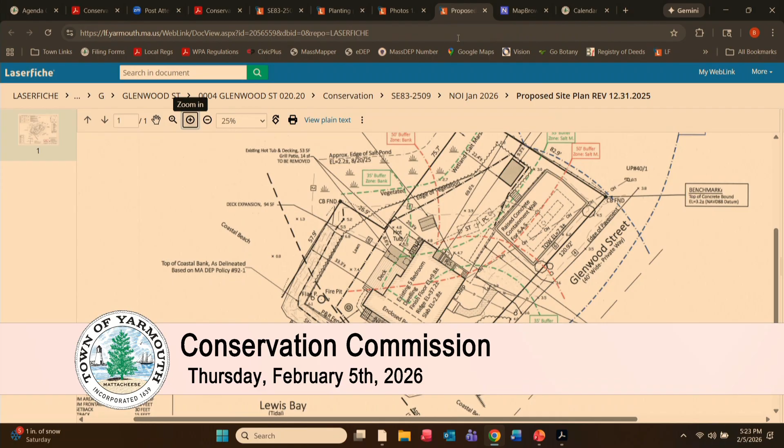And then Blue Flax has put together a mitigation and planting plan, so I'll hand it over to Cece now, and she can review that with you folks.

Great, thanks, Matt. So our plan is proposing a total of 3,300 square feet of invasive species management and native plant restoration, which in the previously approved restoration mitigation plan, there was about 1,100 square feet of mitigation proposed. So we are taking that and adding onto it, tripling that amount.

We're proposing invasive species management in the dark green hatched area just adjacent to the salt marsh, where we've observed bittersweet, black swallowwort, and phragmites. So we're proposing to manage that in approximately 794 square feet.

Just adjacent to that, we're proposing to create a vegetated buffer strip where there currently is lawn. This area will be about 966 square feet to be restored with native plants and shrubs.

And then in the area just to the east of that, in the lighter green area, we're proposing to remove existing lawn and rugosa rose and replant with native perennials, shrubs, and a grass and wildflower seed mix.

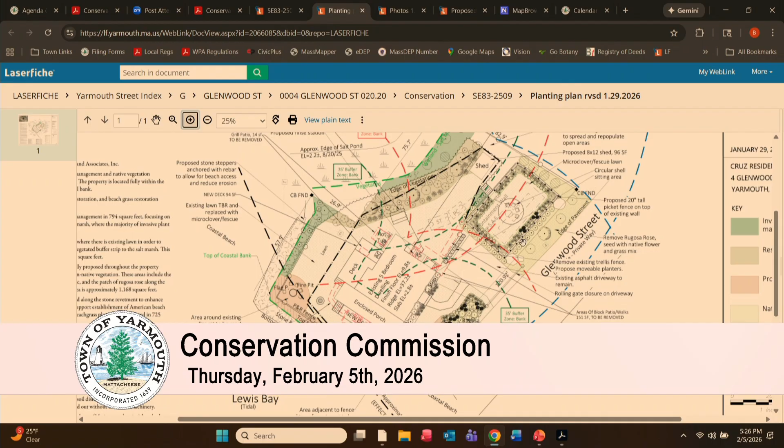And I'll just take it from here. So to conclude, we had a little bit of time since our last continuance. We did have a chance to meet with Brittany last week. We understand your regulations of no structures in the velocity zone and the 35-foot no-disturb zone.

So we have requested a variance for that work. We hope that what we're doing to the site can allow the commission to approve the variance for the construction work.

As Cece stated, Blue Flax has spec'd about 3,000 square feet of mitigation, where about 1,200 was required from the old enforcement order, so it's about 1,800 square feet overall.

And at that, we'll open it up to questions from the commission. Thank you. Anybody want to start?

Go ahead, Ellen. Okay, I'm looking at the drawing that has the area calculations table on it. I was just trying to reconcile that with the description. Could you walk me through the mitigation? There it says proposed mitigation, the 966 square feet. Yeah, that's just part of it.

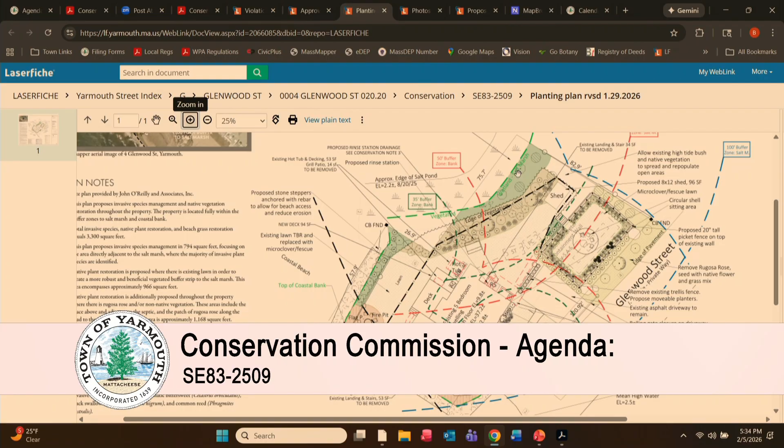Okay. So just to be 100% clear, there's approximately 11 to 12 feet of lawn area that they're taking out and vegetating. I'm going to be honest with you, and I'm speaking for myself, not the other commissioners, but I would not approve this as it stands with the shed.

I would like to see a patio instead of a deck, and I'd like to see the driveway made pervious. Then I'd be more likely to consider okaying it. I'm okay with the rinse station and the tiny addition, which I believe is next to the rinse station. But I'm speaking for myself.

Thank you, Mr. Chairman, if I may. I would actually be okay with the shed where it's located, just because it's next to the concrete wall, so if there were floodwaters, there's already a structure there that the water would run into. So I'm less concerned about that, but I do second your comment about having the pervious driveway.

Those are just my thoughts. Anybody else? Well, it's a complex structure, a complex site. And of course it would never be built today, and we know storms are coming.

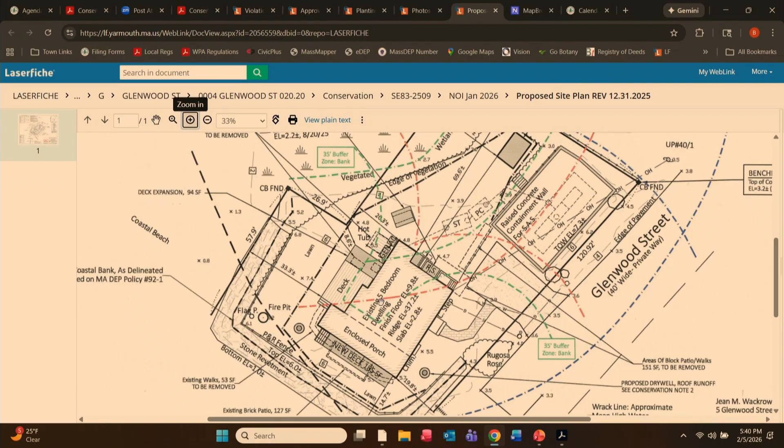It's just a continuation of that deck. And how high are the two decks going to be off the ground? The same. Which is how high? I don't have a measurement. 3.5 feet. We were looking to just basically extend the deck, resecure the new pieces, and the front deck would have been the same height that it is now.

And that's it. Anybody else? Brittany?

Yes, we did meet and discussed some plan revisions. From my perspective, to meet our plan requirements, I'd like the buffer zone lines edited so we can clearly see the zones of the 35 as we discussed, and the mitigation table we've been talking about, to eliminate the unapproved impervious cover areas and clarify the mitigation planting total for this project minus what we have for the enforcement order, with a total to match the Blue Flax plan, which she has called out in the notes separately, just to have everything in one place on the approved plan.

And those are all my comments. Just to remind the commission, this is a variance request for both the velocity zone regulations and the 35-foot no-disturb buffer. Anybody in the audience have a comment or question?

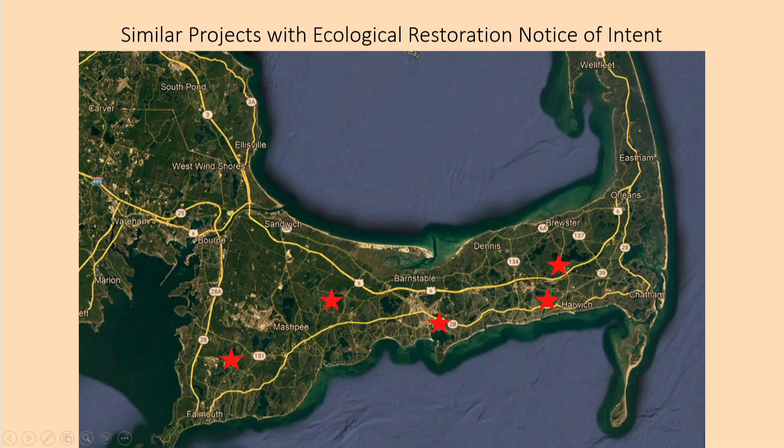These are some examples of other projects that have gone through the Ecological Restoration Notice of Intent. There are likely others, but these are other retired cranberry bog projects that have gone through this as well, so it's not a new process—well, it is a relatively new process, but it's been going through over the last year or so with a number of examples, which is great.

So I'm going to bring you through a picture tour here, and you'll notice in a number of spots where it looks pretty nice. You might wonder why we are doing this restoration project and why change what already looks to be decent habitat. Some of the elements degrading the habitat here are a little bit tricky to see because this site has been abandoned for over 50 years. There's been a lot of plant growth, a lot of recovery since that time. In this particular picture, we're starting at the upstream end of the project site.

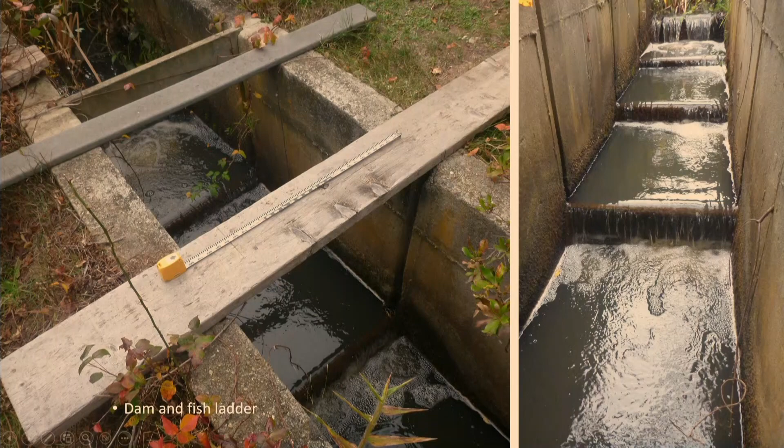We're looking at a portion of Miss Thatcher's Pond. What you can't really see very well is a big patch of invasive Phragmites over here, as well as the dam and fish ladder that restrict flow on the downstream end.

So this is part of an earthen berm here, a concrete dam and fish ladder, just on the downstream end of that. If we continue to move downstream, we see a former cranberry bog here. Again, doesn't look like it, but there are ditches throughout here. This is the stream channel, and this is actually an example of a narrow spot where some large wood fell in and created a bit of a constriction.

This gives us a sense of what the channel dimensions should be in this area, and that is the designed channel dimension in this particular area. You'll see in other locations where the existing channel is over widened in further downstream locations.

Again, this is a wetland upstream of Weir Road. This is actually a location where we won't be touching anything at all. This is part of the former cranberry bog again, but not in an area that we will be disturbing, so that will remain as is, but evolve over time as these conditions shift. Close to Weir Road, we can see an earthen berm that separates the waterway on this side from the wetland on the other side. This is a berm that will go away during construction as part of these designs.

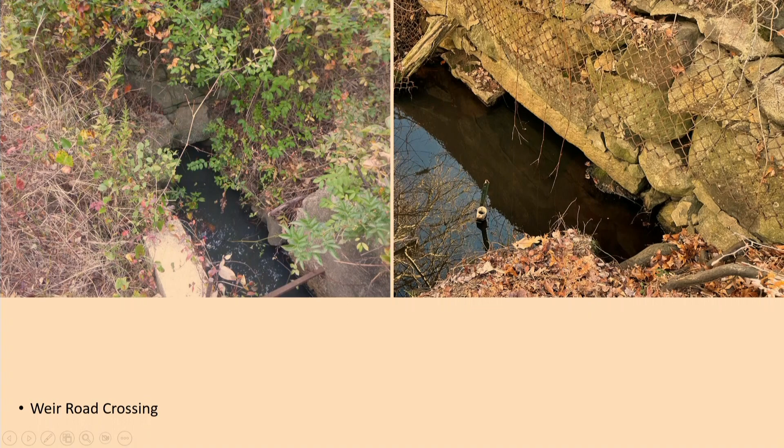That is something that prevents water flow right now and prevents that continuity of flow. And this is Weir Road, so this is the small culvert underneath the road. Again, hard to really see the culvert or the condition of it, but suffice it to say it's much too small for the waterway here. And this is one element of replacement, with a larger crossing here.

Downstream of Weir Road is a pretty special place also, and we have minimal disturbance in this area. This is a really good example of some of the microtopography that occurs in wetlands, and this is some of what we'll be trying to recreate in some areas.

So nearby, this particular spot is another location of ditches. You can see those former cranberry bog ditches. There are elements of this section downstream of Weir Road where we'll be filling these ditches, plugging these ditches, and doing some of that microtopography within those areas or adjacent to them. It's not going to be like you'll see on some of the other projects where there's disturbance everywhere. This is sort of a selective approach: go in, fill some of these ditches, do some microtopography to break up that sand layer that was laid on the cranberry bogs and increase the ecological function there.

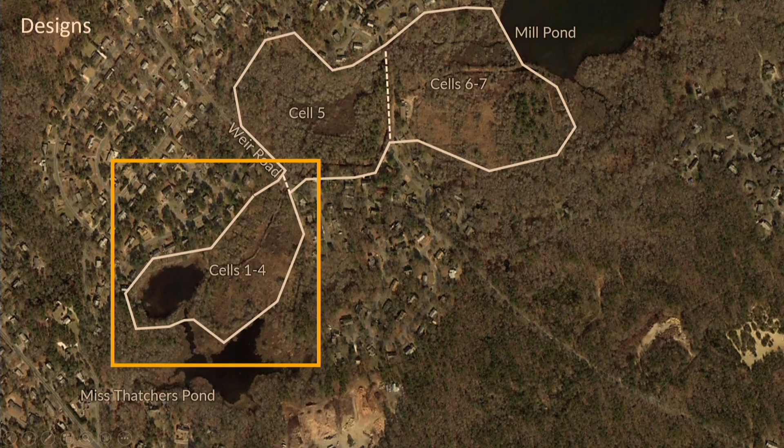So I'm going to start with an overview of the designs from the upstream end moving downstream. These are not engineering designs, since you have those in front of you, but this is for the broader audience to give a general idea of what we're planning.

This portion of Miss Thatcher's Pond will remain unchanged. We recognize the value of that open water for waterfowl and other ecosystems in the area. The dam in this location will be removed, so this open water will be reduced to a smaller, deeper pond with a meandering channel upstream and downstream of that point.

The berm along this location will be removed, and a trail with no infrastructure through the forested area will be available for pedestrian use from Weir Road connecting over to this area. These trails will still remain accessible to landowners.

As mentioned, Weir Road will be replaced with a much larger crossing, which I'll show in a moment. Moving downstream into Cell 5, again less disturbance, so no channel construction through this dashed area. A little bit of channel construction at the downstream end as you go through a new crossing to replace that undersized culvert at the earthen berm, and then the new channel as it comes underneath Weir Road to connect with the existing channel.

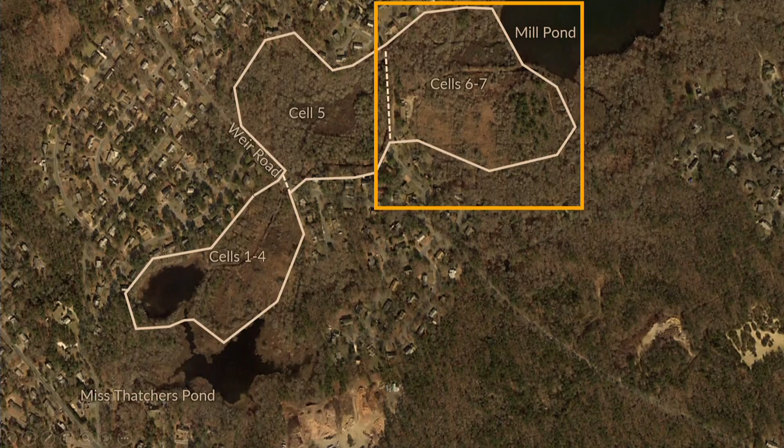Moving downstream into cells 6 and 7, we'll have pedestrian crossing number 3 that goes over that earthen berm, connecting it so access will remain. Then we'll have the boardwalk that extends along this berm, where portions of the berm will go away.

The ditch just to the south will get filled in with the earth that comes out of the berm there. Mostly invasive plant removal in that location, earthen berm removal at the downstream end, and where these big pine trees are, some sand removal and ditch filling, as that has become more of an upland area instead of a wetland.

So with all of this done in this area, we'll see more tidal conveyance, especially as North Dennis Road gets replaced in the future, giving connectivity here rather than blockages of flow from this berm.

This is one typical detail of the Weir Road crossing—a cross section developed by Tighe & Bond. They are joining us virtually and can show more details if there are questions later.

What we're looking at here is the top of the road surface, and the new water line, which will go in this location, a little bit higher than where it is right now. Currently it's down at this elevation. This will be the structure put in place: an arch with footings here.

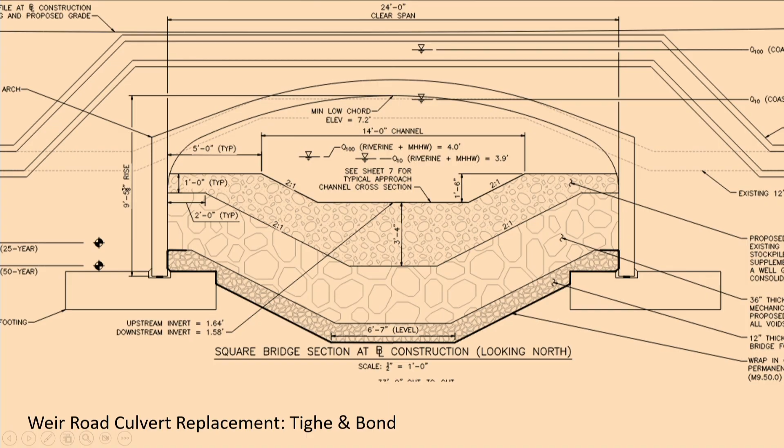The pedestrian crossings, we walked through those before in terms of location. We have pedestrian crossing 1 at the upstream end, 2 just downstream of Weir Road, number 3 at the earthen berm down there, and the boardwalk further downstream.

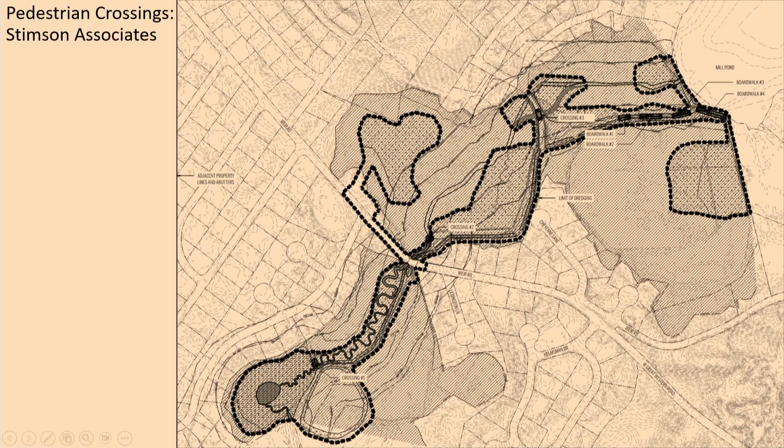Crossings 1 and 2 are very similar in that they're just pedestrian crossings with no hand railings because they'll be low to the floodplain. And this is what they will look like.

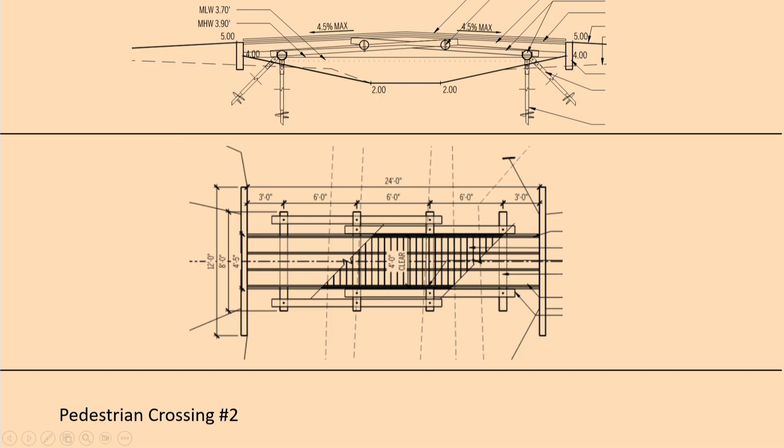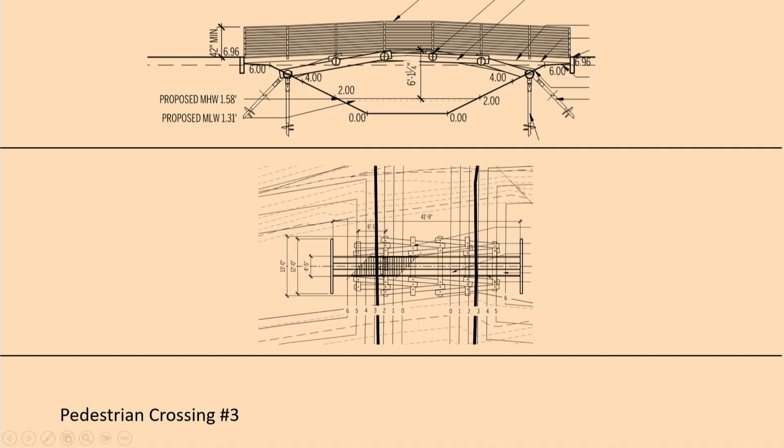So we have the cross section at the top and then looking down on it for the bottom image. It's a bit of a unique design with logs interlocking on the edges and boards for walking across on top, with a small rail on the edge so you don't roll off or step over it. Crossing number 3 is a little bit higher because it's connecting along the earthen berm, so it's going to be higher off the channel, and therefore we have a handrail on either side of the crossing.

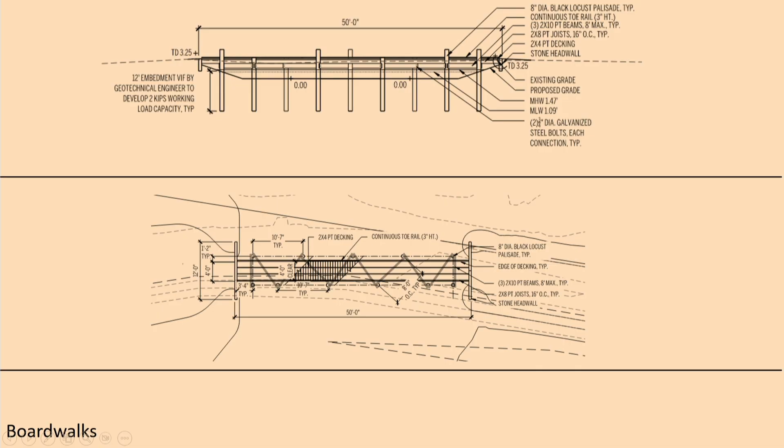The boardwalk, this is one section of it shown here. There will be 4 boardwalks, as shown in the design drawings, at different lengths to span the different cuts in the earthen berm. This is designed as wooden piles with the boardwalk in between those piles in a crisscross fashion. You can see the supporting structures underneath that cross there, with the plankings on top. The walkway is about 4 feet wide.

Okay, so that was a summary of the designs. We can answer lots of questions, but I did want to show you some images of past projects to see what has been going on elsewhere in the region.

We've been working on these types of projects since the first one in 2007, which was Eel River in Plymouth. These images are Tidmarsh Farms, done in 2016. Different from our site here in that these were recently farmed just prior to construction, so you can see the recent farmland there, lots of disturbance, full channel reconstruction.

But very soon after construction, you can see how quickly it rebounds. This is just a year or so after construction, and you can see all the vegetation that comes up. None of that was planted — it all came up from the seed bank.

And this is Eel River 12 years after construction. Here, 17,000 Atlantic white cedar trees were planted. They were 3 feet tall at the time. Now they're about 30 feet tall, recreating an Atlantic white cedar swamp with copious sphagnum moss, cranberries, and all sorts of other plants growing.

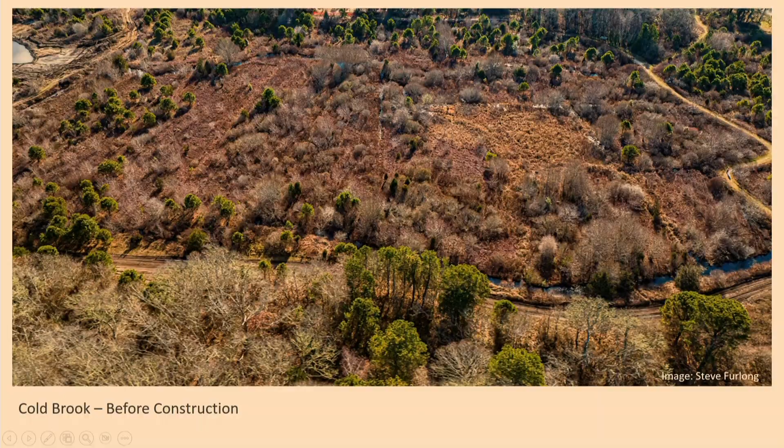Again, our site here at Bass River has been abandoned for 50 years, more similar to Cold Brook in Harwich, which was abandoned for about 20 plus years before construction. You can see prior to construction, lots of trees, looked great, lots of habitat there, but it had a lot of the same fish passage constrictions and ecological impairments as the Bass River.

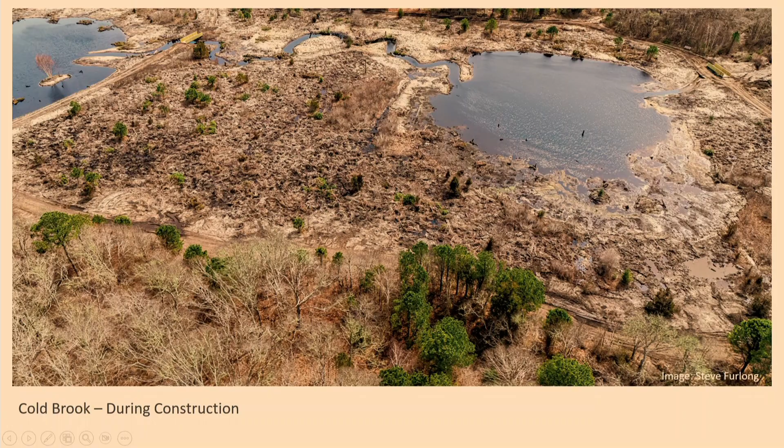During construction, there's disturbance with pond creation, channel reconstruction, stream crossings, and microtopography. Then 5 months after construction, we can see the plant growth right away, comes right up. This was done last year — if you go back there now, it's even more so.

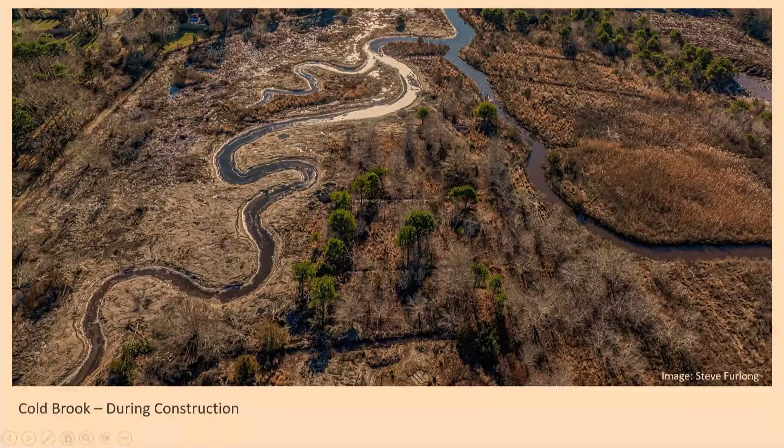It's green. This is the salt marsh portion of this project with a new tidal channel created. Just a few months after construction — there we go — this has really greened up since these pictures were taken. A dozen or so dragonfly species have been identified out there, along with river otters, swans, and ducks. Many species have been found at this site.

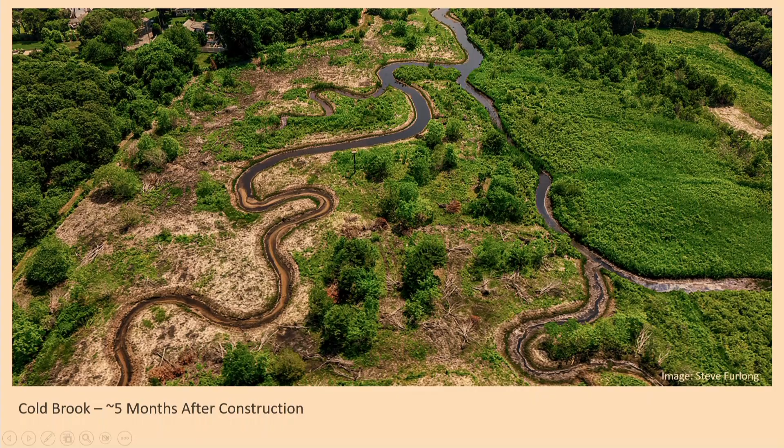So that is what we wanted to spin through here. There's one more slide — a couple shots of Upper Coonamessett also, which is similar, and that was abandoned about 15 to 20 years prior to construction as well, just to show you how quickly these sites rebound.

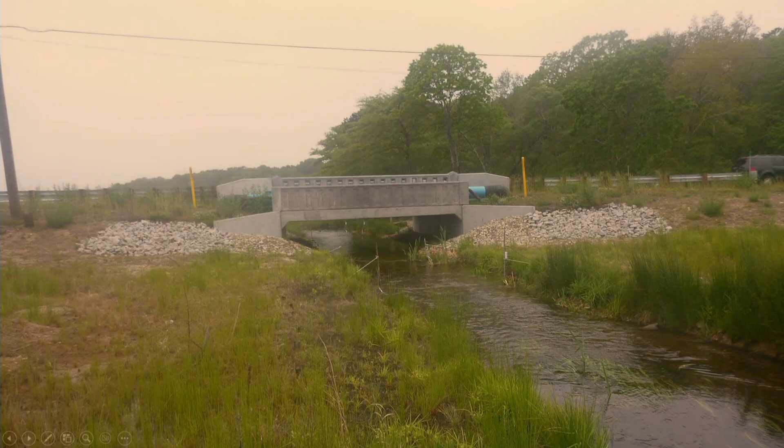This crossing here is not exactly what we're going to see at Weir Road, but the similarity is that Tighe & Bond designed this one, and we were designing ecological restoration. This was a series of tiny little pipes opened up to a much larger crossing — again, not the same design as Weir Road, but a similar idea. And here are other examples of pedestrian crossings we've seen at other sites, designed by Stimson.

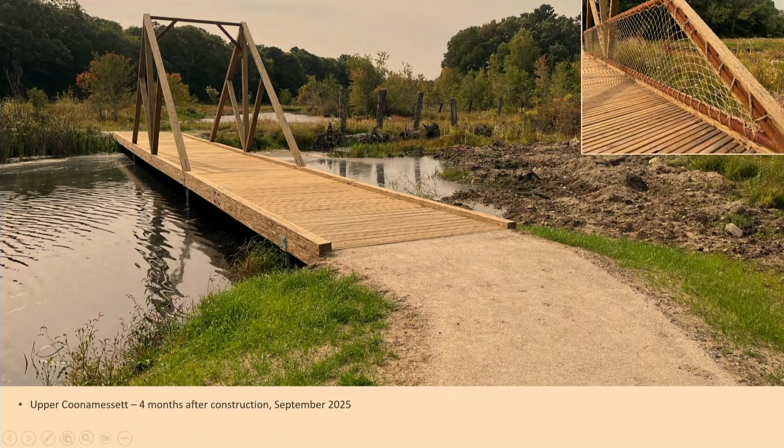Our project schedule, we're in permitting right now, and as Rick said, we've been at this for a number of years. The Weir Road crossing will also be going through the Chapter 85 process with Mass DOT, and we hope to go to bidding towards the end of this year and begin construction.

Beyond the water quality improvement this project will achieve, the fish habitat restoration is really significant. In 1853, Hamlin's Brook, which is the brook Nick was describing earlier, had the second largest herring catch in all of Massachusetts. Last spring, I saw three herring trying to get through that collapsed culvert, so we're really excited about the possibility of reestablishing this fish habitat. In the Coonamessett River, they opened up their culvert on April 1st, and on April 7th, they had herring. So it's a really important opportunity for the fish habitat to return there, as well as the water quality improvement.

Thank you, Nick. Happy to take any questions, and I know we have partners on the line that can show more details for the Weir Road crossing as well, if you'd like. To let you know, we still haven't got a DEP number, so we'll definitely have to continue because of that alone, but we'll go from there. Questions?

Go ahead. So was it ever discussed, just big picture, to have the structures as a separate application, the bridges? I guess this is for Brittany. This whole thing is a lot, but first, I commend you for the amazing, incredible survey that you have done, and the sequencing of the cells and determination of that. It's probably worth mentioning.

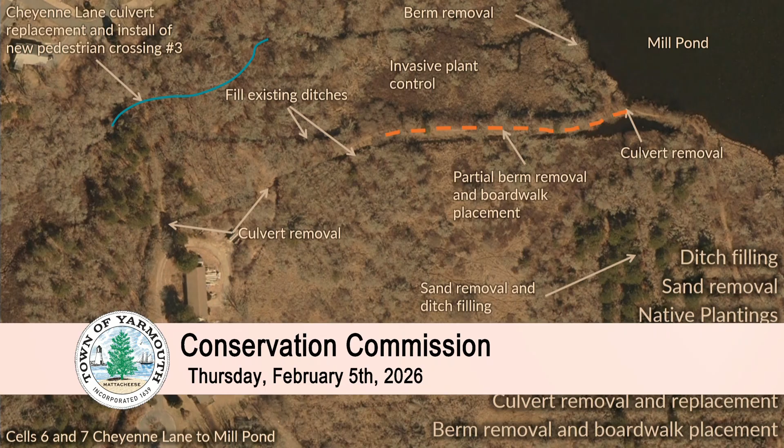In the areas where we're showing the berm being removed, it will dig that berm out and push it into the ditch that's next to it. They'll put the earth into that ditch so that it matches the elevation of the wetland on this side. So in the future, when you're walking across that boardwalk, it'll be like you're walking across a wetland or salt marsh as it evolves. It'll be a continuous salt marsh or wetland from this side, through that opening of the berm, into this other space over here. And if there's not enough earth in this berm to fill that ditch, we have those other mounds of upland that we're going to lower, and that material will go into those ditches.

So there'll be no material that is excavated and taken off-site. All the excavated material will stay on-site and be used to fill ditches.

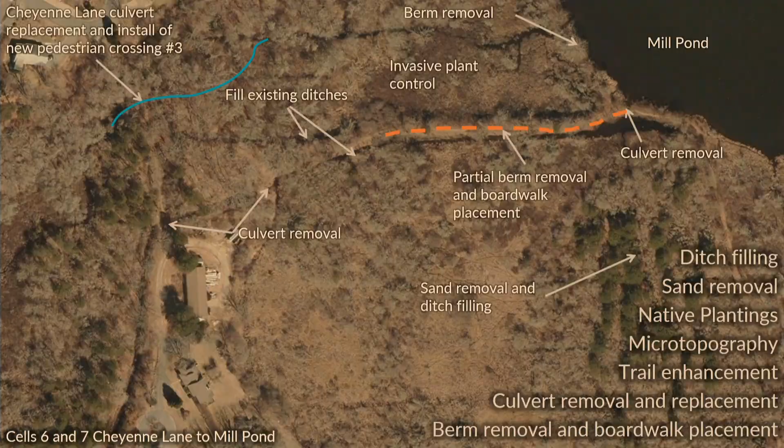That was my concern on the impact, I think it was cells 5 through 7 — you're moving a lot of dirt, specifically over 3,000 yards of fill, but that is all coming from what you're dredging? Coming from the excavation. Not bringing in trucks of earth? That's correct, it's all existing. We really, for these projects, our experience is that it's really expensive to bring material in and to get material off-site.

So for the most part, we try to have a balance of cut and fill on the site. And this particular site, we don't have anywhere else to put excavated material. On many other projects, we have big sand pits where the farmer took sand out of the hillside, and we can just fill those back in with excavated soil. But here we have to have it balance because we don't have those areas of fill.

Yeah, I think that's really important — the fact that, looking at sheet 26 to 27, you have a table specific to cells 5 through 8 where there's no change to the land, if you will. I'm just trying to understand it, and it's super impressive. The survey is just unbelievable. How long did it take you to do all that?

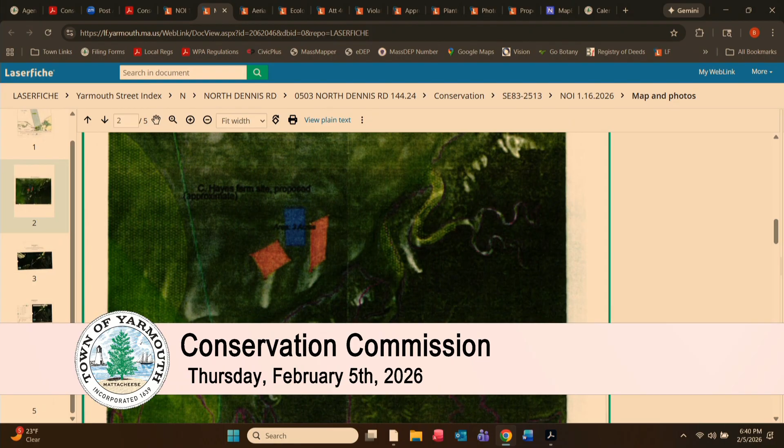Do you want to tell us a little bit about your proposal? Yes, I propose a 2.7 acre aquaculture farm. I've gone through the process with Division of Marine Fisheries, MESA, MEPA, Army Corps, and several others - I have them all on file with approval. Basically I'm just trying to get final approval, going through the proper steps and starting this project. There are 2 existing grants out there, John Reeves and Chris George, so I'm kind of set right up in the middle of them, and I'd like to get going on that - just waiting for some approval.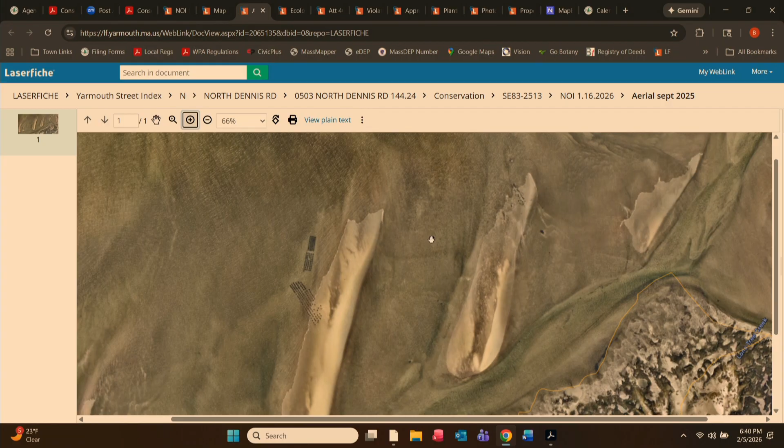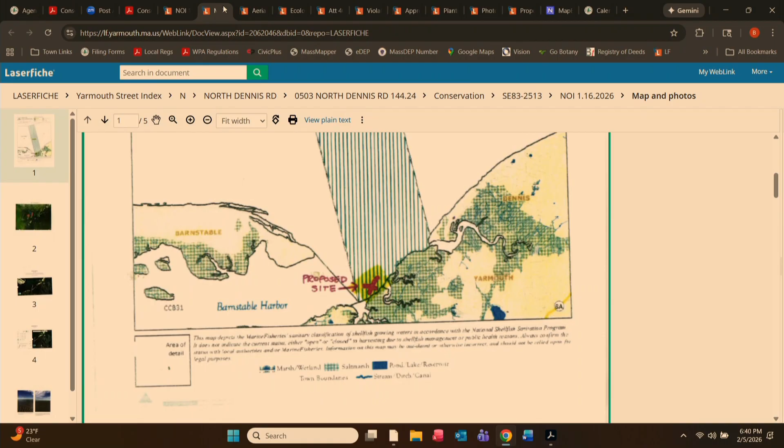Any questions? Could you put up the map again of where this is going to be? Here's the map - this is Lone Tree Creek up here, here's the site, Barnstable Harbor. This is the aerial image showing everything in place for the 2 existing grants, and his is proposed right in between them. That doesn't in any way restrict access by the general public to boating or walking out on the flats, does it? No, and all the grants are marked with buoys, the polyballs. There are a few boats moored in that Mill Creek, but it's very difficult for them to navigate because of the tidal issue in there.

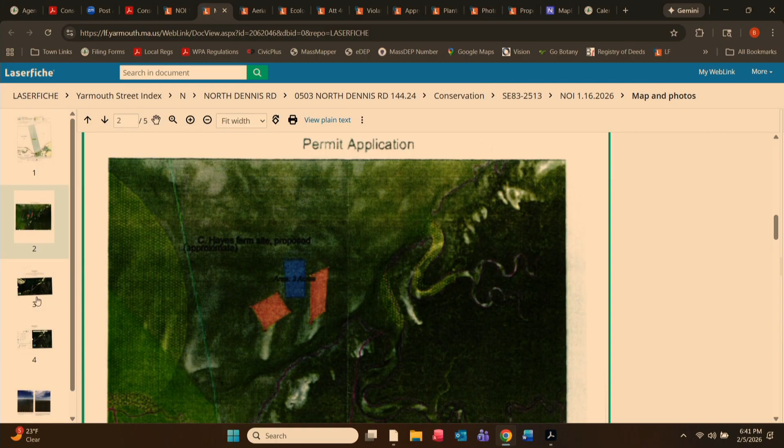And this was already approved by the Waterways and Shellfish Advisory Board? Yeah. I just, it's such an incredible area - you want to make sure it's taken care of very well. Have you seen the ones in Barnstable Harbor, all those guys out there with their oyster grants? Out in the middle of the harbor? From Scudder Lane, that area? Straight out, due north. It's great to see - very low profile, mine are all completely underwater, I don't have any surface floats for oysters to grow. So at high tide there will be areas boats can flow in and out of, but for the most part once you hit half tide or so, bigger boats aren't going to be getting in and out of there.

Anything else? I got a bit lost in the documents - there seems to be a conflict with the Division of Fisheries and Wildlife and the Commonwealth of Massachusetts and the MEPA aquaculture filing. There's a statement that says the MEPA aquaculture filing incorrectly indicates the project is not located within mapped rare species habitat. What does that mean? They're saying he triggered Natural Heritage or Massachusetts Endangered Species Act review, and he did complete it - it just wasn't done at the time of the MEPA letter. So they're saying he said it doesn't apply, but it does apply, and he then did all the correct things after that to remedy it. Oh, okay, all right, so we're good - the letter from the Division of Fisheries and Wildlife is all set as well. Yes, it was very confusing to go through all of it.

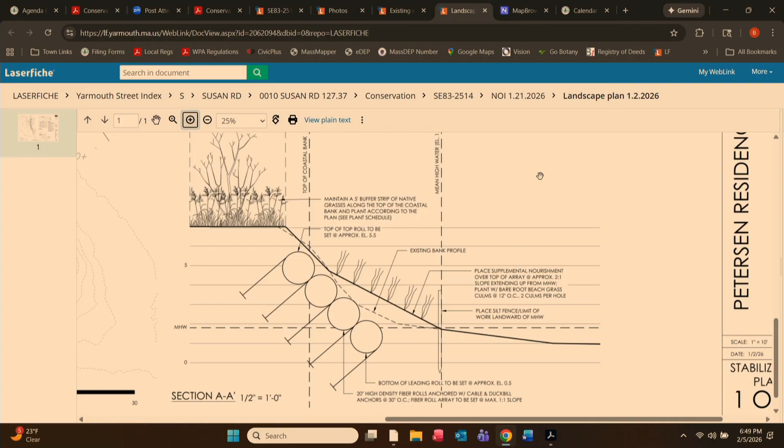We want to keep the installation covered with sacrificial sand so nourishment isn't an issue, and we're also okay with eliminating phase 2 of the project. That was my recommendation—if we're going to get permission for all of it at once, that way if they wanted to construct it later, they could without coming back. But they're not super interested in doing the second phase anyway, so I don't think that's an issue.

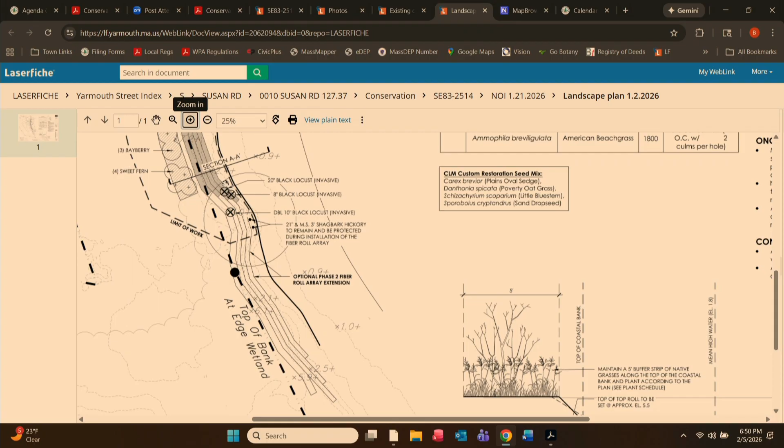As far as how the ends of the coir array will be installed, one end butts up to the stone groin that's there, and we would tie the installation into grade behind that stone groin. On the southern end, we would taper it down from 4 logs to 1 and tie it into grade, into the eroding coastal bank.

I think those are most of your questions, and that's about it. So if anyone has any questions, I'm happy to answer them. Anybody have questions?

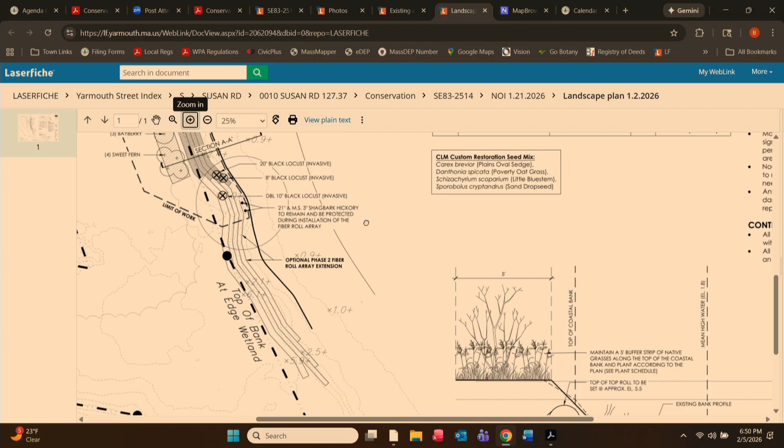Could you speak to the rate of erosion at this site? I can find that out. I can find out what the calculated annual rate of erosion is based on the length of the bank and the height of it, to get the estimated sacrificial nourishment that would need to be placed over it. I don't know the actual rate of erosion. I do know it's hard to see in aerial photos on Google Earth because of the locust tree cover.

Actually, the reason I asked is because through the aerials, the site seems fairly stable. It looked like there was an erosion event in the 2017, 2018 timeframe, but since then it hasn't really eroded significantly more than that, at least not from the aerials. So I was wondering what the purpose of this project would be.

Yeah, so I think with most areas, with the exception of the coast along the Atlantic, erosion doesn't typically happen 1 foot per year. Usually things stay stagnant, and then all of a sudden you get hit with a storm and lose 3 or 4 feet all at once. I think that's what you see in that aerial image. There's been perpetual undermining of the coastal bank for quite a period of time, as you can see in some of the photos that Brittany had. I think you could stick a tape measure 4 or 5 feet under those locust trees.

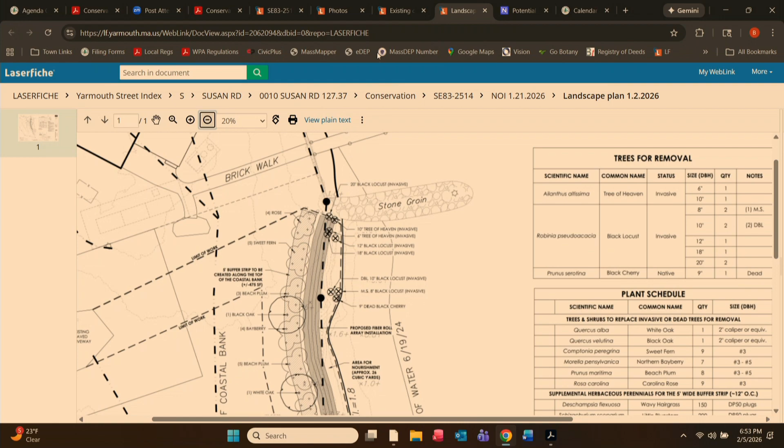Yeah, well right on the other side of the stone groin there's also a bulkhead. I can't predict what would happen if the groin was removed, but I think the negative impacts from the bulkhead would be similar to the groin. It might occur further down or closer to the bulkhead itself. I'm not quite sure, which is why we're proposing a bioengineered, vegetated solution, whereas we're not looking to extend the bulkhead or add any more hard solutions further down to exacerbate the problem.

Okay, I was just wondering if this application has proven successful before, has been utilized elsewhere? Because if it works, that's a great thing. Yeah, it certainly works. It definitely doesn't work forever - it's like a semi-permanent solution. They have the ability to last up to 15+ years with proper maintenance, mostly keeping them covered and vegetated. But it certainly isn't forever. So, they do prove effective.

We've installed thousands and thousands of linear feet of coir fiber rolls along the Bass River, both in river systems and protected estuarine systems like Green Pond in Falmouth, and even closer to open ocean conditions on the Sound in Chatham. They've lasted - I know we removed an installation that was previously done in 2008 and replaced that in Chatham on Nantucket Sound 2 years ago, so it lasted 17 years. So they do have the ability to last. One of the biggest contributors to them not lasting their full potential is UV degradation from the sun, which is why you want to keep it covered.

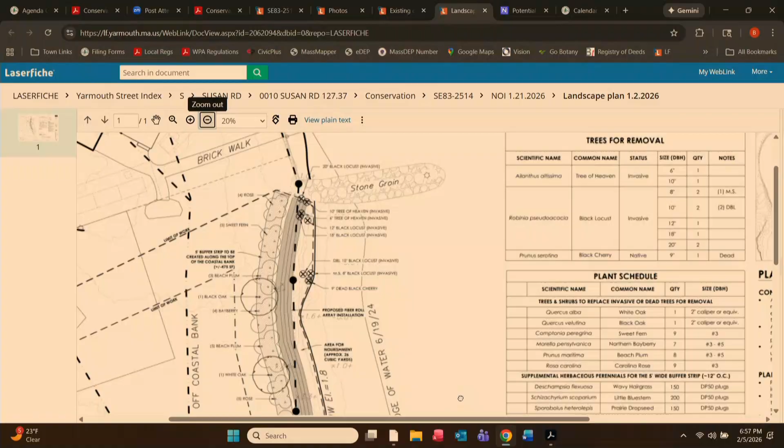So where is the end of this? You can see the groin installation, and one locust tree that kind of Y's out at the bottom. That's more or less where the end of the installation is. So there's salt marsh to both the right and left of the installation, seaward, that's not shown on your plan.

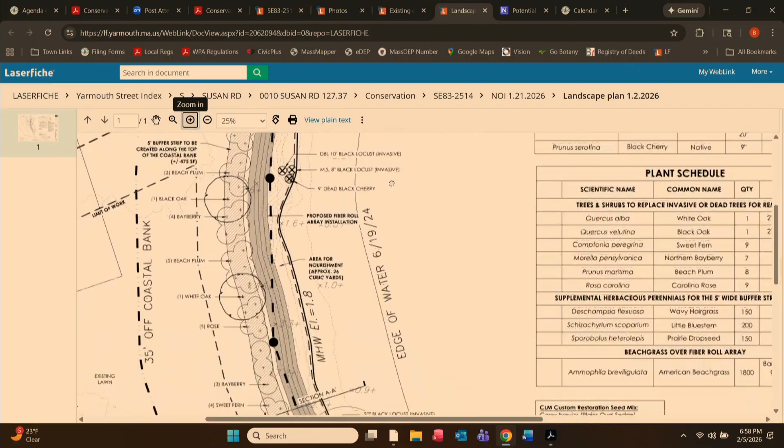Okay, if you could add those in. Yep, we can make the revisions to revise the species, add a note about an annual nourishment trigger, and the area that led to my comment, which is ultimately up to the commission to recommend eliminating phase 2, is at this bottom end.

I cannot identify salt marsh from an aerial image, but it looks like there could be. There definitely is, down at this point. So that also needs to be reflected on the existing conditions plan, because when we approve an order, we're approving everything, all the resource area boundaries on the plan.

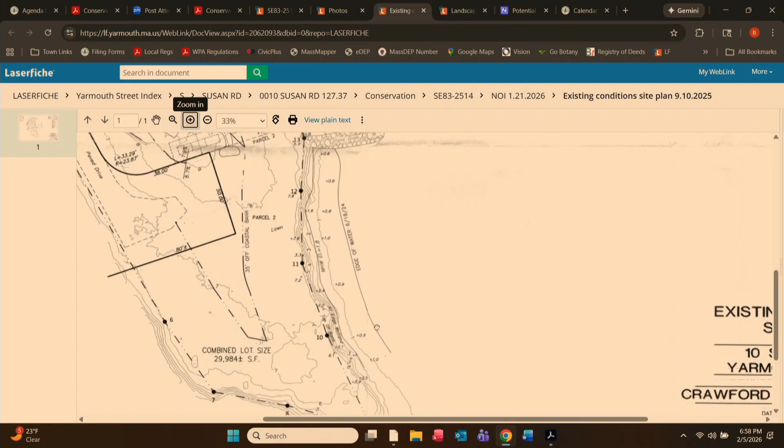So who's your surveyor? Dan will need to capture those, both these salt marshes here and the one at the bottom, even though work is not proposed directly on it, since it's there.

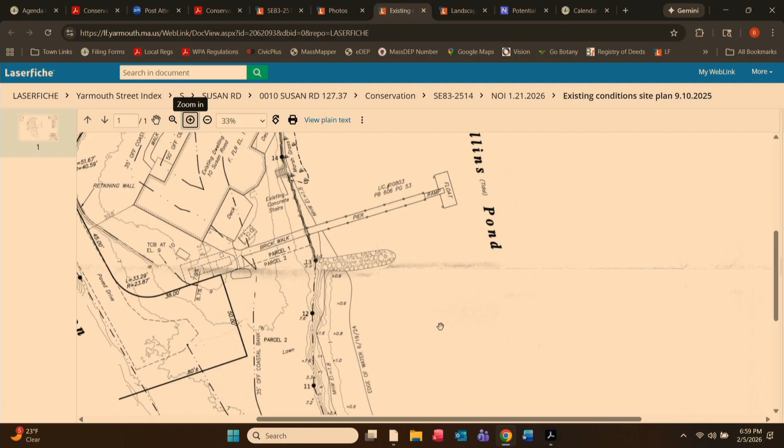Do you want just the landward extent or the whole polygon shape of the salt marsh? We can, because you're not going to be able to go out there right now. So, would you be okay with just locating them with aerial photography and making a note that resource delineation wasn't confirmed in the field?

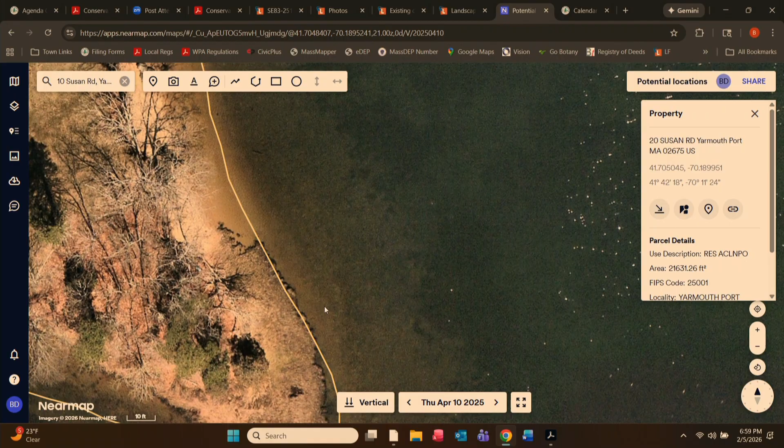That would be up to the commission. I'm not sure. Well, could they, once they could do it in the field, make the adjustment if there is one? In other words, if you miss it, field locate it on a revised plan?

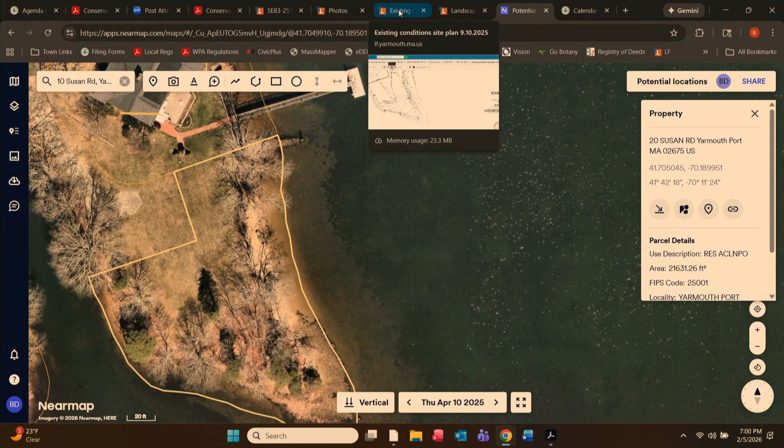Let me talk to Down Cape and see what they have, because we don't have the property all the way to the peninsula shown since it wasn't part of the project. So there might be more information on the surveyor's existing conditions plan rather than the layers we brought through onto the restoration plan. So I can double check that. Okay, that would be great.

Even if you want to not show the other topo side, cut that off and just show the extent that is near your proposed project, that would be excellent. Yeah, we did get actual spot elevations that you can see on there, where the X says X 1.0. We wanted to get spot grades so that we could make sure the array was located in the right spot and is accurate for purposes of constructing it. So I'll double check what's on the survey existing conditions plan rather than the restoration plan.

Have you implemented projects like this for coastal bank stabilization when there's salt marsh footing it? Yes. And it doesn't have a negative impact, the nourishment doesn't have a negative impact on the salt marsh? Not at all. Okay.

Anybody else? Anything else from you, Brittany? You've answered all my questions. I would just echo the concerns for a coastal bank stabilization project on a parcel that is undeveloped.

That's kind of what I was alluding to as well, taking into consideration the groin, because to me it seems like the groin is maybe the cause of a lot of this erosion over time. So providing some justification that it's not the groin, or the wave energy is coming from a different direction, just to justify why this project is more important to stabilize the dune than to just let it continue to erode naturally, knowing it's an undeveloped lot.

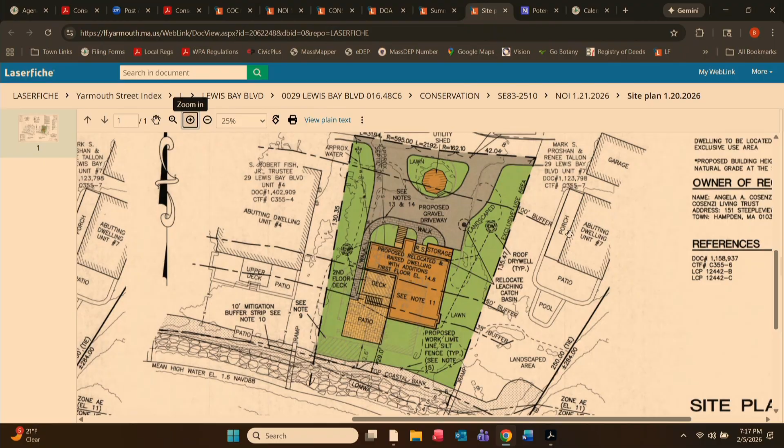Okay, so this is not an unusual thing. I've seen where they've moved buildings. Bradford asked if this was a raise and replace, but it's really a raise and relocate, right? Correct. That's somewhat common around here, I would think. And what is the foundation under the existing building? Is it a slab? I would have to confirm that. They may have a shallow crawl space. I was just wondering what they'd be lifting up from the current location to the new location. Yeah, I believe it's a mix of concrete and rock. It's an older house, so it's not like a newer poured concrete foundation.

I think it's an interesting solution to the problem of being too close to the shore, I guess. Sounds interesting. Thank you.

I'm questioning the patio being only 12 and a half feet away and within the 35-foot buffer. So there is a patio there now. We're getting further away from what is existing. Is this the patio that was on? Yes. Oh, I remember that. Yeah, there is a section of unpermitted patio. That was part of the old order conditions. They're actually out there today, I think, started removing that.

I know where I live. Remember that? So I would like to see the patio eliminated, and how do other people feel. It's not a velocity zone, but it's in the 35-foot buffer. Well, again, we are having a significant reduction in hardscape within that 35-foot buffer. Even with that patio there, they have a patio there now which they enjoy and they'd like to continue to enjoy. We're getting further away from the resource areas, and that's our reasoning for it.

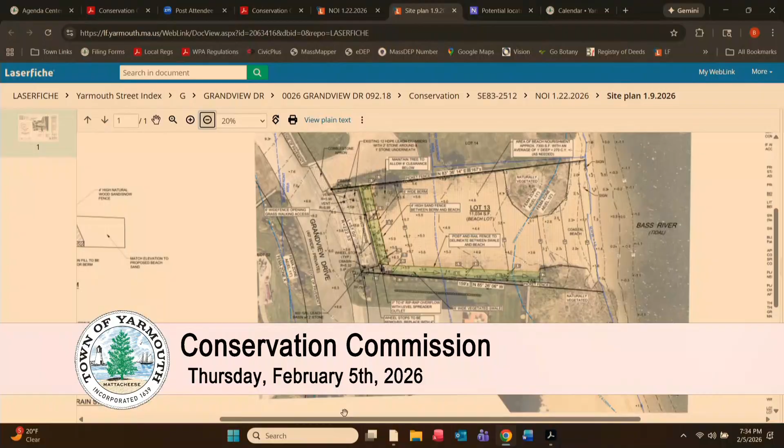So just to recap: the first part of the project is to provide some additional ponding in the parking area. The second is to provide an overflow, a managed overflow versus just busting out a pretty good swath of the beach, and then provide that vegetated swale.

We do consider this what's qualified as a redevelopment project, meaning this isn't combined with a new parking lot or expanded parking lot — we're just reusing the existing parking lot. So we're trying to provide upgrades to the best, most feasible extent possible for the site and the constraints we're working in.

We did receive some staff questions and concerns, and I've been working through them. I do expect to just ultimately continue this tonight, but there are a few items I'd like to specifically try to get a little input from the commission on, and again from Brittany. If you don't mind, can I just pick out a couple of them and then you can go through the rest.

There was a comment about the riprap, that small stone piece in the southwesterly corner. What that is, the concrete flows over, it's a splash pad just to manage it.

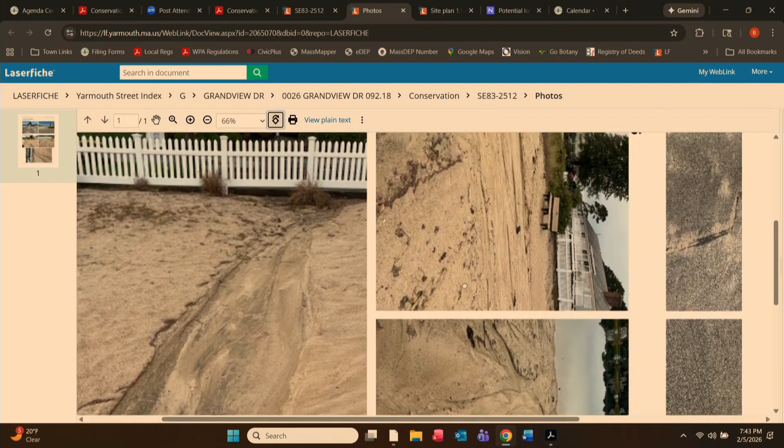Okay, but what's driving that? Where is the stormwater coming from? So there's all this - why wasn't it decided to replace or get rid of the pavement? It just seems like a lot of this water flow is because of that impervious surface. It's not much of it, but why not make it pervious? Why was that looked at?

It had to be looked at. Did you look at removing the pavement? I'm back at the drawing now. So there is a pretty significant underground system, and at least with the pavement, by going into the catch basin, that allows some settling to happen there, so the cleaner water can go into the system.

I think in these conditions with sand always present, you can see the sand in those pictures. I think it would clog up that system pretty quickly if it was changed from pavement to shells, stone, or gravel. That parking area is probably only about 1% of the pavement contributing to it - there's the road going up, and the road coming back from other intersections. It was not really an option, in my opinion, to remove that, mostly because of the pretty significant system underneath it. As soon as you take away that pavement, every little silty piece of sand will just go into the ground anytime it rains and clog up the system.